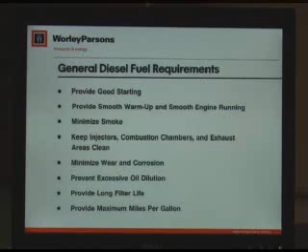Cetane number is very similar in diesel engines to the octane rating in gasoline. So we have rating numbers, and you try to target about a 45 to 50 typically.

And you'll hear lately there's been a lot of development in converting coal and coke, because the States has probably one of the largest coal deposits in the world. We can convert coal to gasoline and diesel through some interesting chemistry that's been proven and available today. In fact, Houston has a coal-to-liquids project, where you gasify the coal by basically burning it with air and steam to produce carbon monoxide and hydrogen. We call that a synthetic gas because you synthesized it.

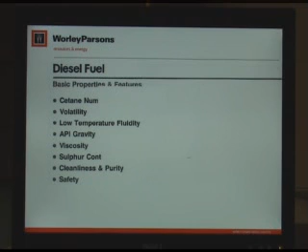Then you run that through a special catalyst the Germans invented known as Fischer-Tropsch, and you can actually polymerize this carbon monoxide with the hydrogen to produce gasoline and diesel. The only problem, of course, is it costs so much more than producing from oil, because oil is still so cheap. But the big thing is it has very high octane and cetane ratings, so they're thinking of using it as a blending component, the same way I was talking about MTBE, where we had 10, 11% and it boosts the rating. So that's really what they're thinking of doing.

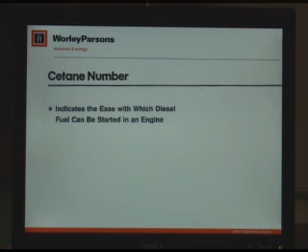So the cetane number is an indication of the ease with which a diesel fuel can be started in an engine. The higher the better. It's also got low temperature stability and smoother combustion with less smoke. It doesn't smoke as bad if the ratings are high.

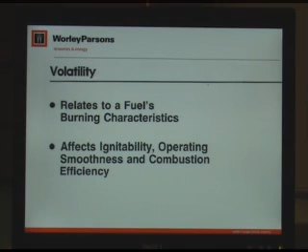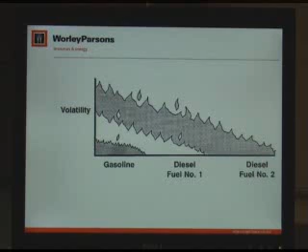Volatility relates to the fuel's characteristics, burning, ignition, operating, and combustion efficiency. These are some pictures comparing volatility versus the different fuels. Diesel 1 and 2 have very low volatility because you're not vaporizing it in a diesel engine, compared to gasoline. Again, low temperature fluidity matters.

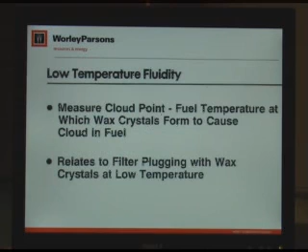We can probably move a little faster through these. They blend different diesel products to produce different mixes. What's the difference between diesel 1 and diesel 2? They're for different engine sizes. Diesel 1 is for smaller engines in cars, while diesel 2 is more for power, so the quality is less.

It's not as demanding as what we call ultra-low sulfur diesel today. Those are predominantly used for power generation. Up on the North Slope, I don't know if anybody's working on the ConocoPhillips ultra-low sulfur diesel project, it's kind of interesting. The economics show they use diesel for generating power in Alaska, that's without a doubt. So there's a lot of diesel engines all over the place.

They consume roughly somewhere around 3,000 to 4,000 barrels a day of diesel. We looked into the economics of building an ultra-low sulfur diesel plant versus fractionating the diesel, sending it down to California and maybe Washington, converting it to ultra-low diesel, and then shipping it back up again. We found out it'll cost about another dollar and a half. So you're paying about $2.50 today, plus another $1.50, would be $3-4 a gallon.

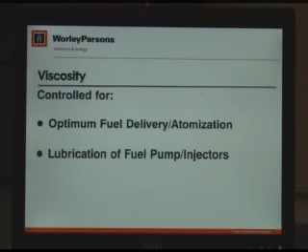Again, gravity is important, we control the gravity. The greater the gravity, the higher the API. Viscosity is important too, because you have to pump that fluid around. Sulfur is important, and as we said, now the mandates are to reduce the sulfur below 15 parts per million.

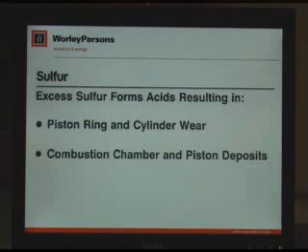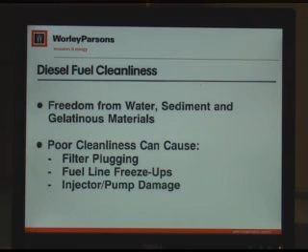I think I have examples of that, I'll leave this. We look at water, we have to get the water out so it doesn't freeze on us, and then cleanliness, filter plugging and so on, because it's kind of bottom of the barrel material, so you're trying to maintain the quality of the diesel. Fire hazards and flash points. The flash points are an interesting property.

Flash point is an interesting property. It's a simple test: you put the fluid you're testing in a small beaker, heat it up, and measure the temperature with a thermometer. A little flame is applied, and we raise the temperature 10 degrees at a time, dipping the flame in each time. If it doesn't catch fire, you heat it 10 more degrees and keep going until it catches fire - that's your flash point. Lighter components burn right away and have very low flash points.

With diesel products and jet fuels, the flash point is an important characteristic because it measures how much light material is in that mixture. You want to maximize the flash point, because you don't want too many light ends in your gasoline or diesel.

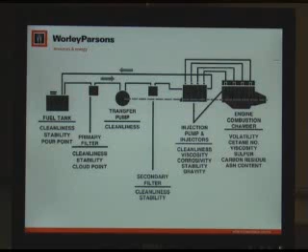Otherwise, when you're compressing, it'll start igniting before it really reaches its full stroke. That's an example of how diesel moves from the tank all the way to an engine. You go through all these different steps before it gets to your tank, which makes you wonder what's sitting in all those terminals and the bottom of all those tanks after so many years.

The trend is decreasing the amount of straight run distillates, because the cetane ratings are low, and increasing the use of cracked material - higher density, lower cetane quality - along with increasing additives: flow improvers, cetane improvers, stabilizers, and detergents.

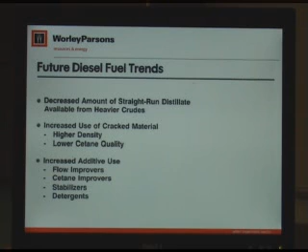There's a diesel engine impact, and you want to try and minimize the emissions. Everybody sees this, but lately the plumes have really diminished. It's not as bad as it used to be, and the reason is we have ultra low sulfur diesel now - it's been mandated since '06, last year.

How does biodiesel compare? Biodiesel is a very high quality diesel because it doesn't have any sulfur, and it has very high cetane ratings. But the volume is still very low - even if you converted all the corn into biodiesel, it would only satisfy maybe 3 to 5% of the total diesel consumed in the United States. Still, it's a good blending component to improve your cetane.

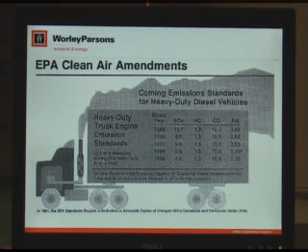Most of the diesel cetane numbers - this one doesn't show them. These are different emission standards, and there's a lot of research going on by EPA and the industry to improve the quality of the diesel fuel itself.

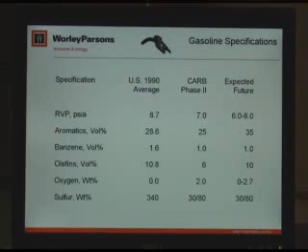Gasoline specifications - now these are the latest. 1990 was the reported baseline. You look at the RVP and you'll see it's going down. Right now, this was done a few years ago during the Clean Fuel Program, and we were looking at 6 to 8. Aromatics are, I think, still at 35%. Benzene is still limited to 1 volume percent.

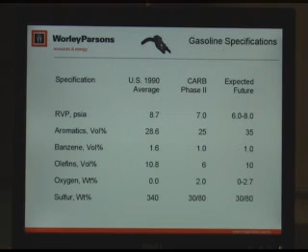Olefins up to 10%, oxygen typically 2.0%, 2.7 max. And the sulfur - 30 is average, max allowable is 80. But the whole blend really has to be about 30 parts per million of sulfur.

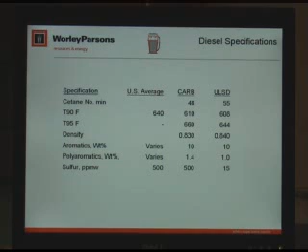Diesel specs - again, the cetane for CARB diesel is at 48, but ultra low sulfur diesel brings that spec up to about 55. The T90 is the boiling range at the 90% point, and we used to be able to go up to about 640 degrees. That means you can cut a bit more and produce more diesel out of a crude oil cut. Now they're limiting it to 608. It's really about how much heavy material there is - that's the heavy material that cracks in these engines at high temperatures and forms the black plume, so they try to reduce that end point.

What did you do? No.

Density, aromatics - polyaromatics are limited to 10% of total aromatics. And sulfur is limited to 15 parts per million. Biodiesel actually has much higher cetane ratings - maybe 50, 60, even 70 to 80. So it's an excellent additive to boost and bring up the cetane ratings to about 55.

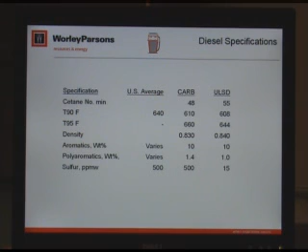You guys should give yourselves a hand for staying awake. That's it - we finished in record time. Last time we finished around 7:50.